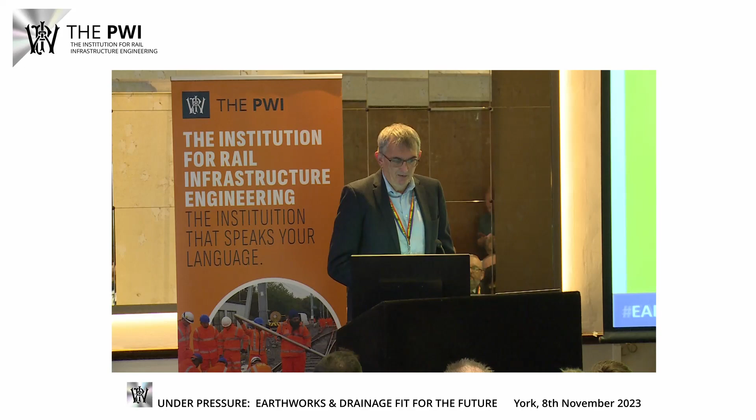I won't be dwelling on any detail related to Carmont. I don't think it's really appropriate for me to do that. But what I really want to do is guide you through some of the changes that have been brought about by Carmont and other previous incidents in respect to earthworks management.

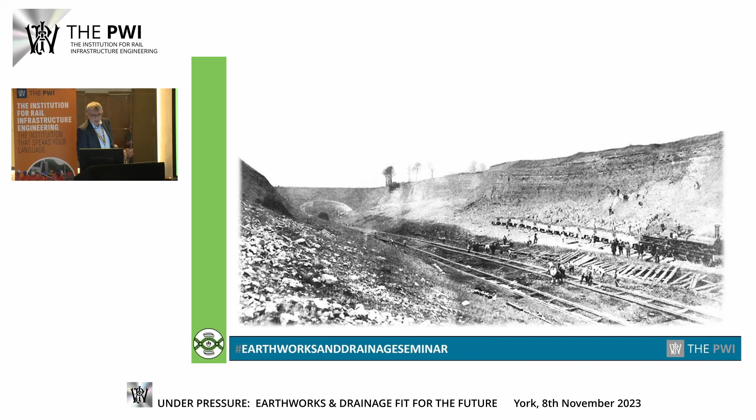As mentioned, I worked on Northwest region as an asset engineer for quite a long time. And it was always enjoyable finding images from history of assets that you know and love, including Harbury cutting, Dove Holes cutting in the Peak District, and one of the cuttings on the Great Central line through the chalk, showing the steepness of the slopes.

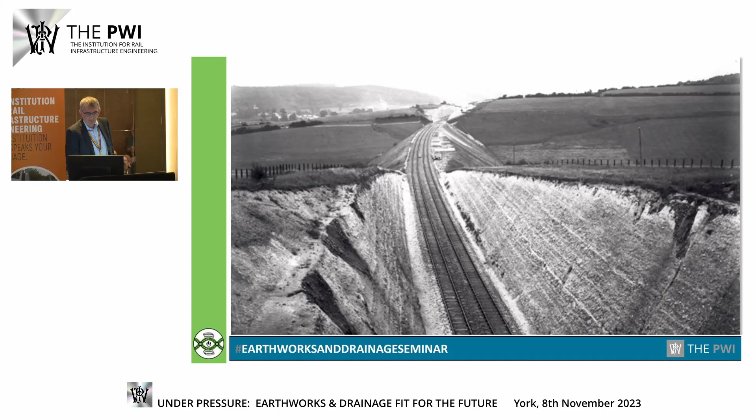This is a generic image. I've no idea where it's from, but it just gives you an indication of the way that earthworks were built. And I think it does us a lot of good to remember how the earthworks were built, because it feels quite chaotic, particularly to us who are engineers and have worked in civil engineering with modern standards and modern design approaches.

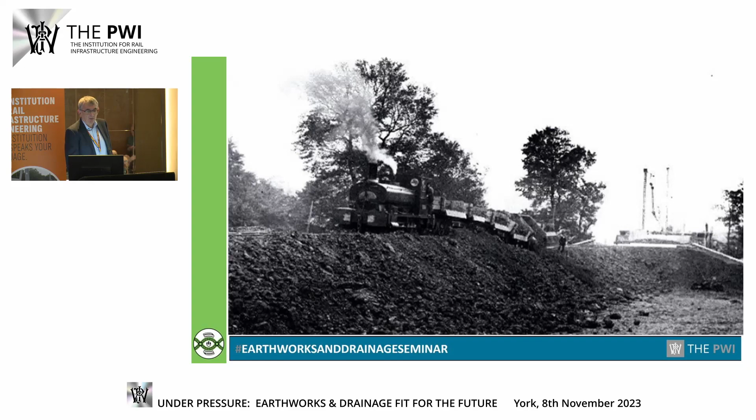I want to focus on change because there's a lot of it about. There always has been in the railway industry.

Organisational change can occur anywhere. Any organisation goes through it, changes in personnel, management structure, new technologies. But we're subject to changes in legislation, political change because of our funding streams, and that affects the structure, the economy and the strategy of the business. We also see changes due to climate change, environmental awareness and that kind of thing, which have a really strong impact on the way that we manage stuff.

And yes, we also get exceptional changes as a consequence of incidents such as Carmont.

Really, one of the key moments for us was the Ais Gill derailment in 1995 on the Settle and Carlisle, where very sadly the conductor of the train was killed, struck by another train. That really marked the start of Railtrack recognising that they needed to get geotechnical engineers into the business to start looking at and categorising the earthworks, and it led to the first earthworks asset inventory capture in 1997.

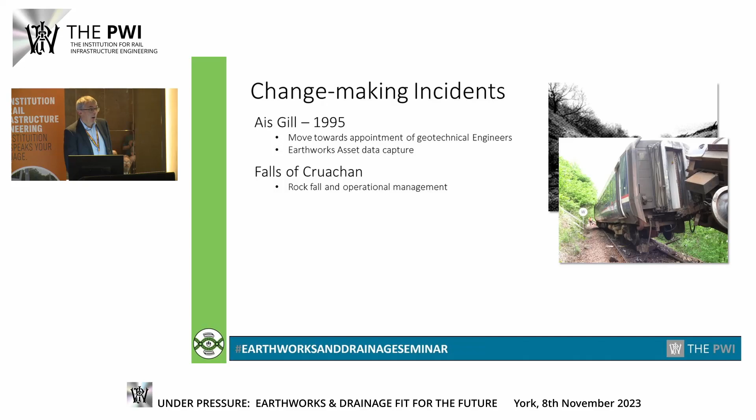Falls of Cruachan, a very dramatic derailment there with a boulder falling out of a soil slope, derailing a two-car DMU, really highlighted the risks associated with third-party land.

Watford, of course, which could have been an awful lot worse than it was, with a passenger train travelling at 60 miles an hour, decelerating towards the tunnel portal of Watford and encountering chalk which was washed down by an immense amount of surface water in a storm event. This led us to really focus more closely on groundwater, in particular drainage around tunnel portals.

And Carmont, of course. In addition to the RAIB report, which Nick so kindly shared some of their findings with us, there was a Network Rail Level 3 investigation report, but the geotechnical team and civil engineering also commissioned a report by Lord Robert Mair to have a look at our management of earthwork assets.

Really, a lot of stuff came out of that. We were commended for our management structure for assets in the earthworks, but they did find one or two recommendations to make, 53 in total, across a whole wide range of things, from technology, interface with other disciplines, our diagnostic tools, examination, evaluation, the amount of data we captured, and so on and so forth.

And really what we're doing now, and what is marking the change in the geotechnical industry, certainly, or the geotechnical business in Network Rail, is working through those and seeing where we can make improvements and how we can best capture the recommendations. We've also, of course, had a load of routine railway churn.

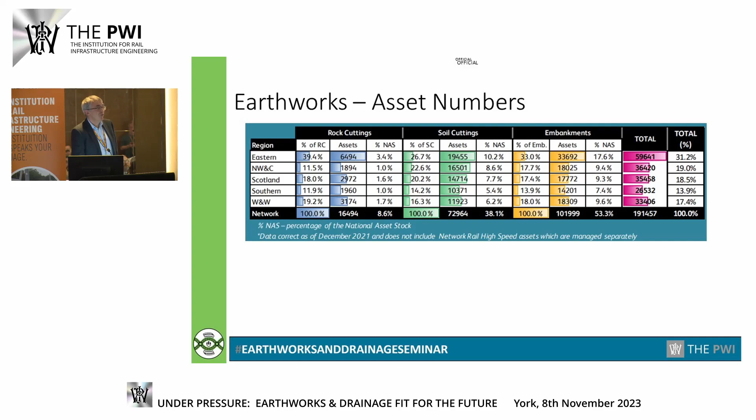So that's the process. But you've got to bear in mind that we're applying this to 190,000 assets. An asset in our terminology is a 100-meter section of an earthwork greater than 3 meters in height, whether that's a cutting or a soil cutting or an embankment or a rock cutting.

And actually, in general level, the hierarchy of risk increases as we go down that list. Clearly, as we saw from the image of the Falls of Cruachan, a boulder beneath a train can have extremely serious consequences, and it happens virtually instantaneously.

In the current asset policy, what we do is we take the hazard assessed of the earthwork, so all the features seen which suggest how stable or unstable that earthwork is and how likely it is to fail, and we assign that hazard category A to E.

On the left-hand side of this, we see the criticality band, which considers the consequences should a failure occur. This means that if you're in box 1A, it might be a single track freight line which carries 1 train a week at 20 miles an hour. If you're in box 5E on the top right-hand corner, that could be a 4-track electrified railway at 125 miles an hour with a train every minute.

So you can see that we're able to establish a hierarchy of risk using the structures and management techniques we have, to assign the appropriate mitigation measure and the appropriate investment to maintain the quality of the earthworks.

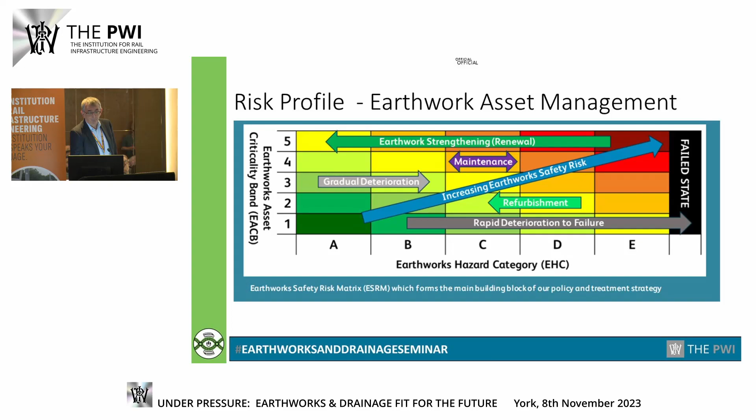So if you do proactive maintenance, it's an awful lot cheaper to replace your timing belt than it is to replace your engine.

What this means for us is that we really need to identify where those failure points are for our earthworks. That would allow us to initiate timely maintenance, but how do you apply that to 190,000 earthworks, particularly when you consider how these things were built in the first place, some of them almost 200 years ago. That is a big challenge for us.

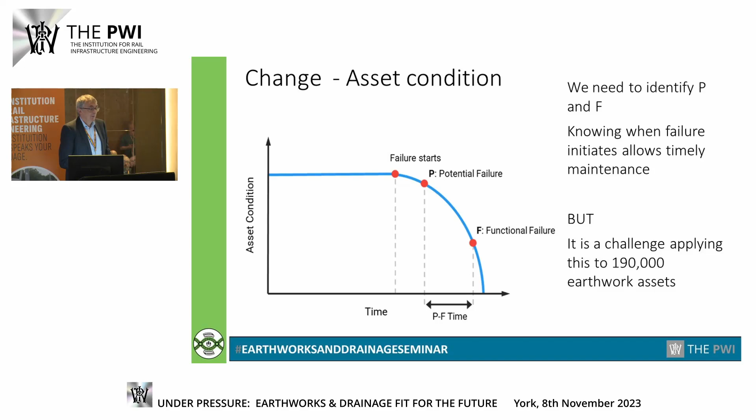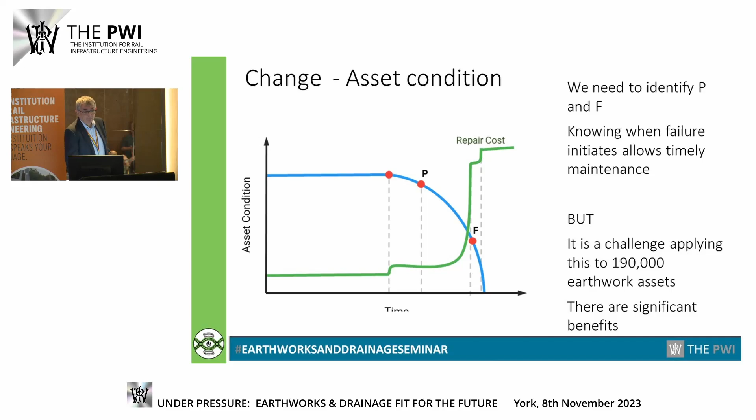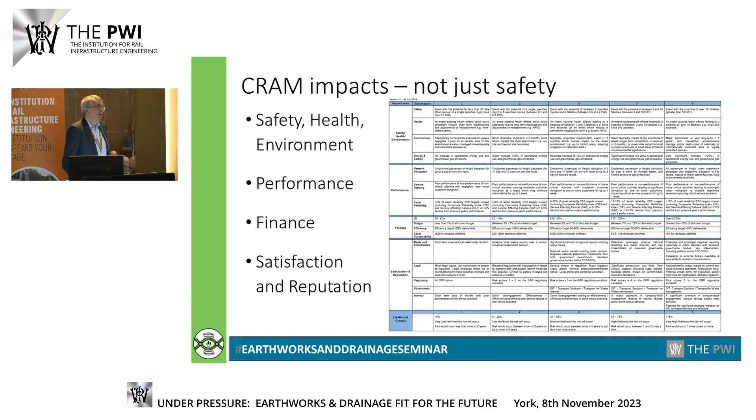But you can see there are huge benefits if you catch the failure early. We also have to consider other impacts as well, not just safety, but also the impact on performance of the assets and the work on them. Financial considerations, we only have a limited budget to spend, and also customer satisfaction and our reputation, which, as you'll be well aware, is not always the best.

So, in an ideal world, we would predict failures before they happened. And if we were able to do that, we'd be able to run trains perfectly satisfactorily without any concern over earthwork failure, even in the most extreme of conditions.

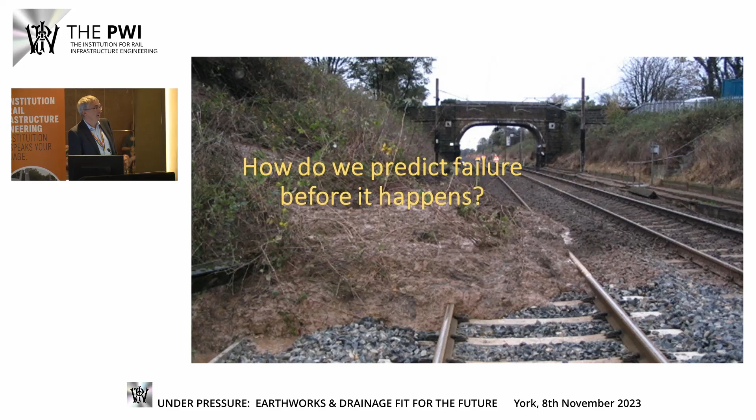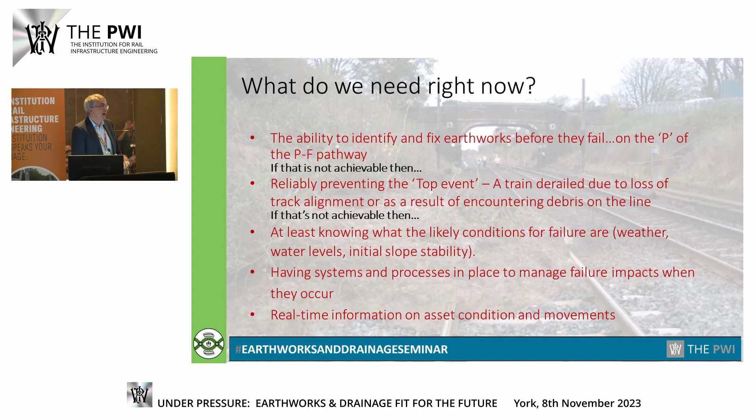What we need to do is identify that pathway. If we can't do that, we really need to aim to robustly prevent that top event from happening. And if that's not achievable, then we at least need good information about the likely conditions for failure, the weather conditions that could cause it, surface water runoff from catchments, the water levels in the slope, which have a huge impact on stability, and also a measure of how stable the slope is as we see it at the moment.

Our focus has been on developing systems and processes to give us better knowledge of our assets, and also methodologies to improve the mitigations we put in place, to get an idea of slope movements, the pace of the movements, and also systems where, if movements happen, we get a warning and can stop trains before they reach them. So an awful lot of work is being done.

We've already started it, even prior to Lord Robert Mair. If you look at our technical strategy document and the policy document, all of these were R&D projects for CP6, touched on this, and we're intending to continue those into CP7. But Carmont and the Lord Robert Mair report was a real impetus, a real change marker for us in the earthworks management business.

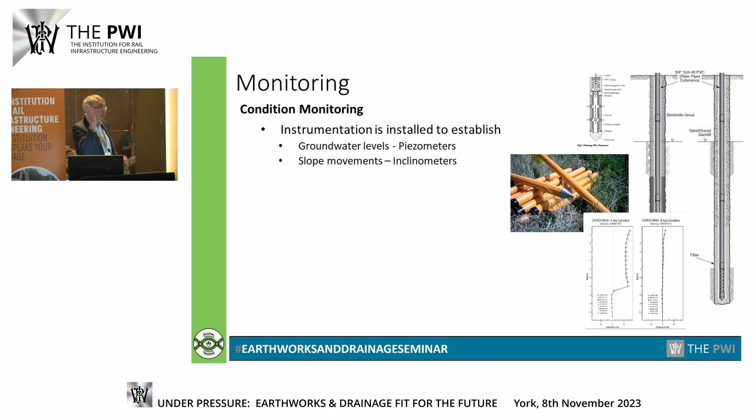So we monitor earthworks, we put in geotechnical instrument arrays such as inclinometers and piezometers, inclinometers measuring slope movements in the ground, piezometers measuring water levels and changes in water pressure.

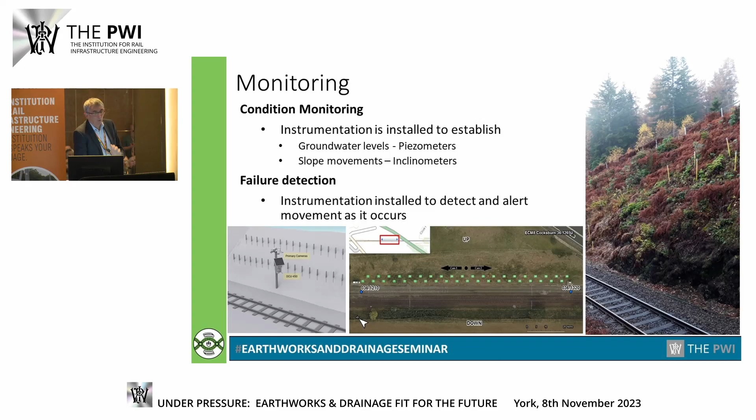We also are rolling out more and more failure detection equipment. If you look at the image on the right-hand side, those yellow posts each have an accelerometer measuring movement in 3 dimensions, allowing movements to be tracked, and indeed they can be linked into signal boxes, although let's not go there for the time being.

So in a period of an hour on this particular slope on the Severn Estuary, a landslide occurred, and it was picked up by the LiDAR system and alerted the asset engineers to the fact that a failure had occurred. There were mitigations in place, but this kind of technology has real potential if you have a specific location of concern and want to be alerted as soon as anything happens there.

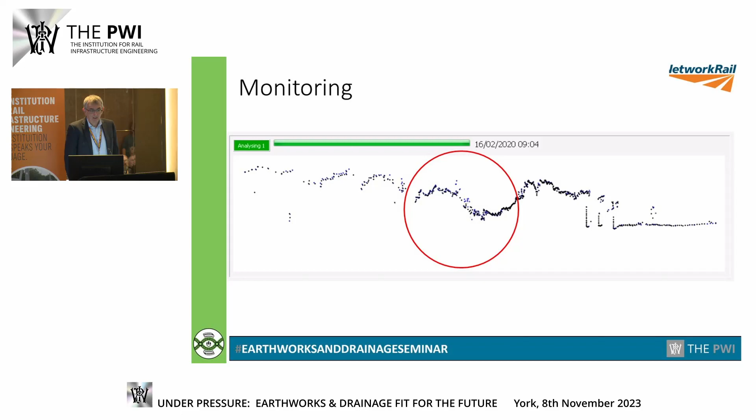In a lot of cases, these assets may be incredibly expensive to fix, and there's another one immediately next to it just waiting to fail as well. In 2014, the company did a full LiDAR survey of the network, and this, it's fair to say, has been a real game changer for us.

We have point cloud data for all of our assets, so we can form a 3-dimensional model of them. This has been essential for the geotechnical engineers and other engineering disciplines in order to identify features on the ground, and is a first port of call if ever there's an incident on the railway, because we can go and see what is going on the ground.

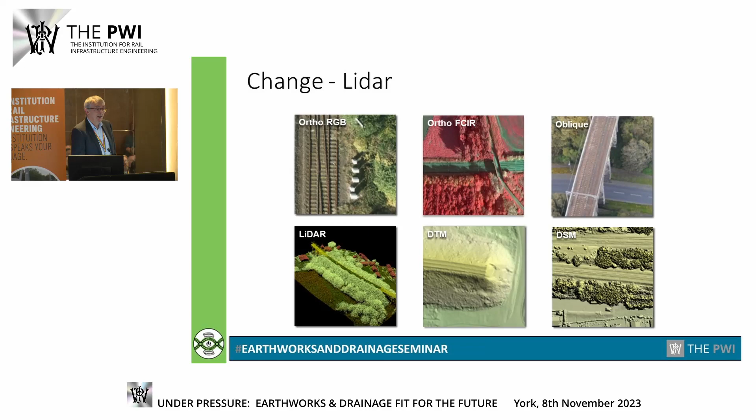We can use LiDAR to track change in height and elevation. The color shading shows the difference in height of the ground between one flight and another, and therefore gives an indication of the movements that have occurred.

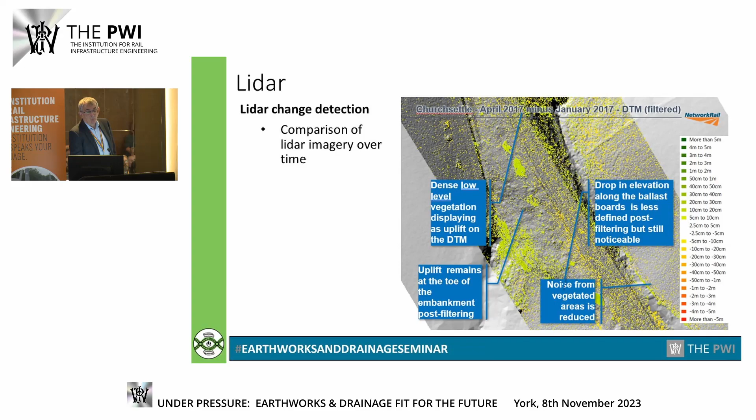And we've also used the LiDAR data to consider risks and hazards from third-party slopes.

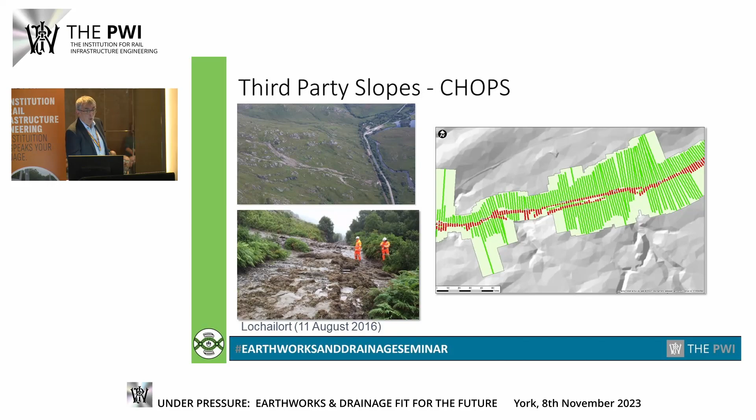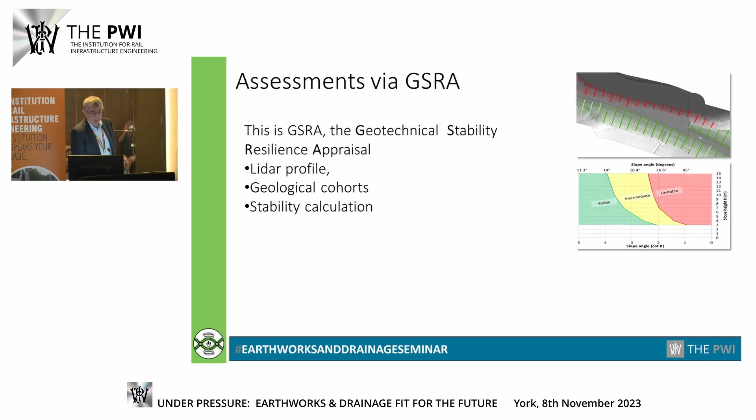Perhaps one of the most exciting uses of this information has been in modelling all of our earthworks using the Geotechnical Stability Resilience Appraisal tool - bit of a mouthful - in which we plotted cross-sections for all of the earthwork soil assets, soil cuttings and soil embankments, and undertaken a series of calculations, making assumptions about parameters based on geological mapping, grouping those geological strata into 11 groups of material types, and undertaking a complex range of stability calculations to work out how many of our assets are theoretically beyond their point of stability. This is a huge, powerful tool in enabling us to get early warning of which earthworks are going to fail.

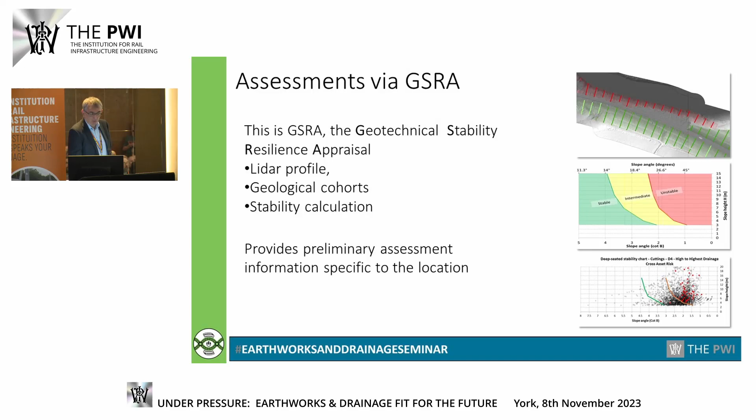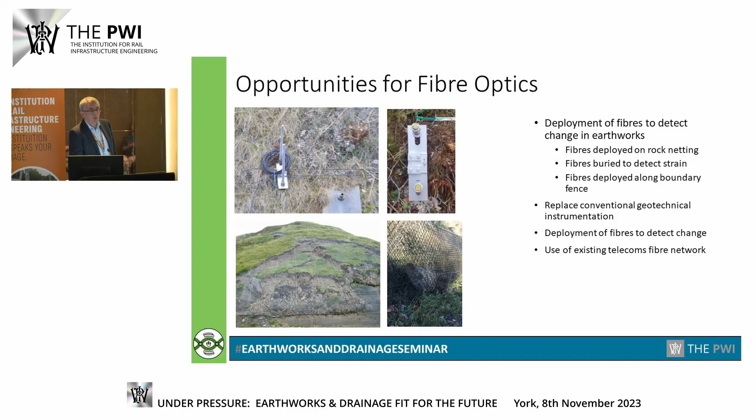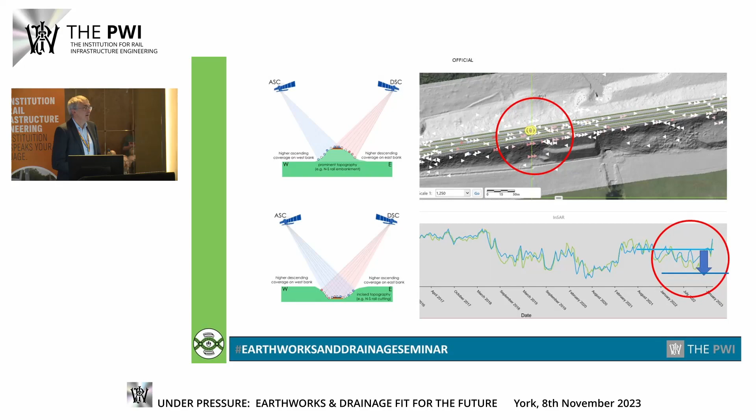There's also a lot of opportunities in fibre optics, whether in strain measurement or vibration measurement - I'll say a little bit more about that in a moment - and also, of course, satellite observations. If we look at the bottom graph there, over a period of time between two passes of satellite, they were able to record movement in the embankment at Hook, which actually subsequently failed in January this year, following a period of extremely wet weather.

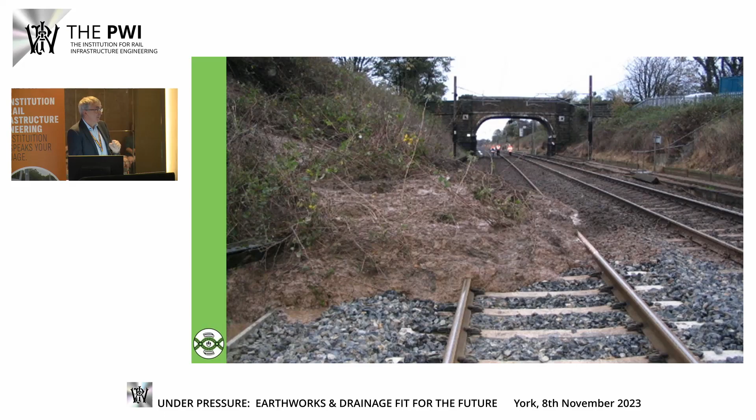So these technologies have promise, but they're not the fully formed article yet. So if we look ahead, the key is managing our data better. GAIA is our asset insights application, gives us an opportunity to pull together a whole load of data sets from a wide variety of locations within the business, whether that's track information, weather information, survey data, and so on, pull it to one point. We're working on that. That is in development. We already have business planning through that process, but we have high hopes for it over the coming years to ensure that we're able to provide a one-stop shop for geotechnical information.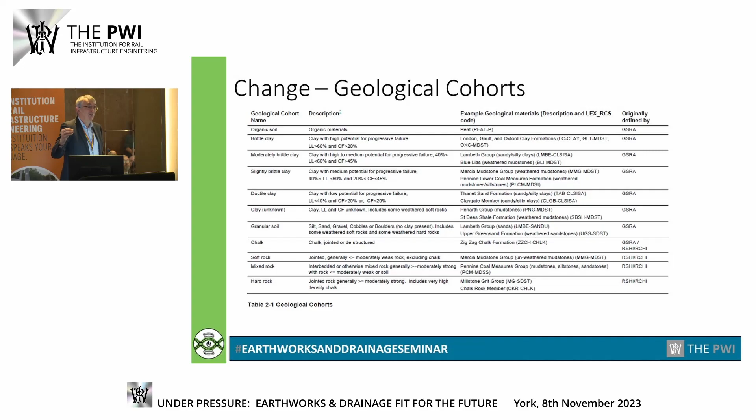We've done some work to look at the geological cohorting, and this table of 11 material types represents a distillation of over 2,400 individual geologies found on the network. That gives us an opportunity to say, if you've got this type of material, you can use these curves, and the potential for failure is this at these locations. It's a really powerful tool and helps the asset manager really start to get to grips with the condition of his overall asset base. And if an asset engineer has 30, 40,000 earthworks to manage, clearly he needs that help.

We've also looked at a very specific distillation of all of the measures and methods used to classify earthworks failures, and adapted those and distilled them down to one core means of identifying earthwork failure types, which is quite specific to the railway, which allows for the fact that a lot of our natural slopes, cutting slopes, are less than 200 years old - not like the hillsides that we see, which may carry glacial features. And so we need a specific tool to use for the railway.

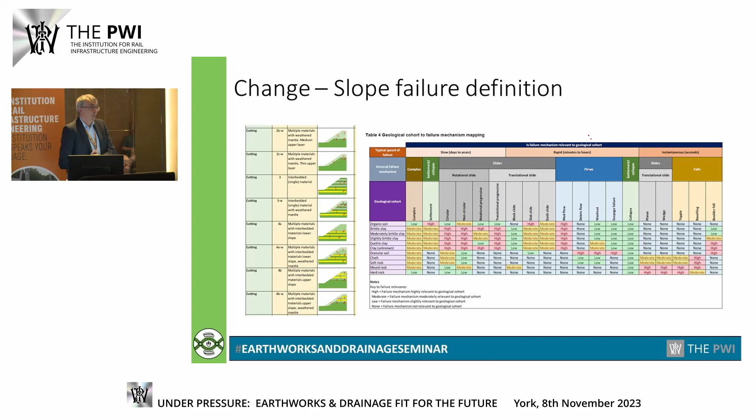And there's an awful lot more to be done with earth observation technology as well, including moisture content recognition, which would be a great help in helping us understand the stability of our earthworks.

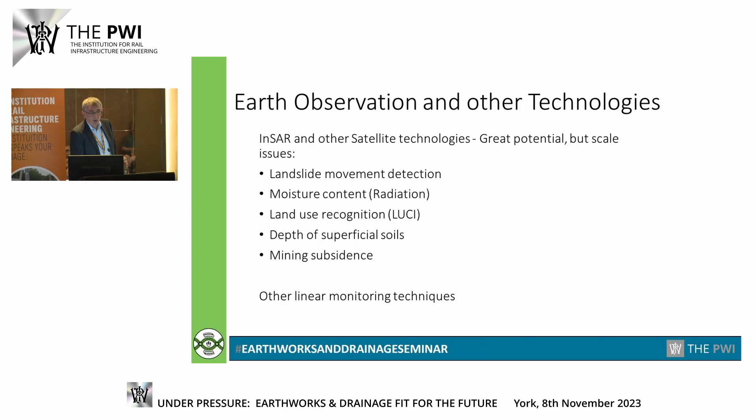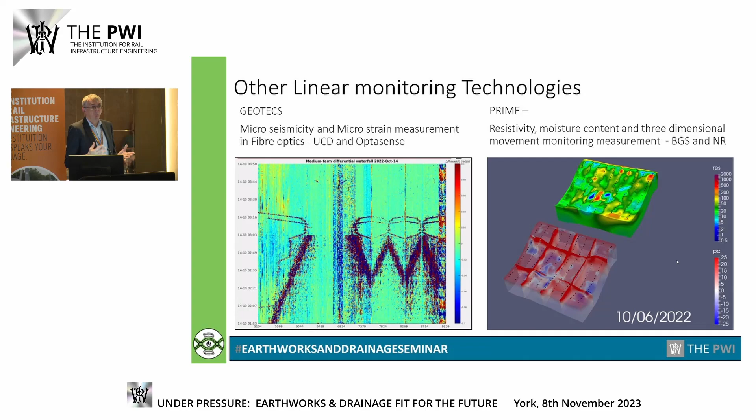Final few words. Linear monitoring technologies. We have fibre optic cable running along a lot of our network. How great would it be if we could use that to measure movements, strains, get advance notice of changes in the earthworks. We've also got the Prime tool, which looks at resistivity of the ground, tracks desiccation shrinkage, a big problem in the southern part of the country, where dry earthworks cause train delays and speed restrictions to be imposed. And, of course, climate tools, which enable us to identify weather advancing towards locations. Strangely, a dry day in Scotland - I'm sorry, I couldn't get a picture which involved lots of red and orange, but it's not that hard.

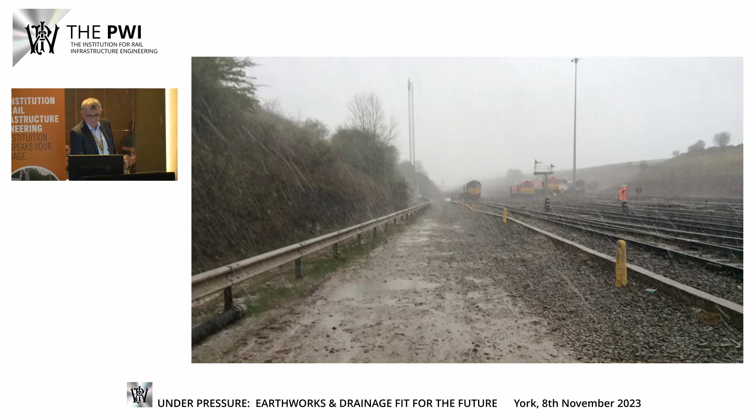So how do we manage these days when it's like this? A whole host of things I've just been through, but I think the most important thing for us is that we work cooperatively with the other disciplines, because no earthwork is isolated from everything else, whether it's the track or the drainage or indeed other assets as well. So it's really important for us. And whilst we're pushing ahead with these technologies and really making the best we can of that change driven by man, that we get to the point where we have assets that are fit for all other asset groups as well. That's it.